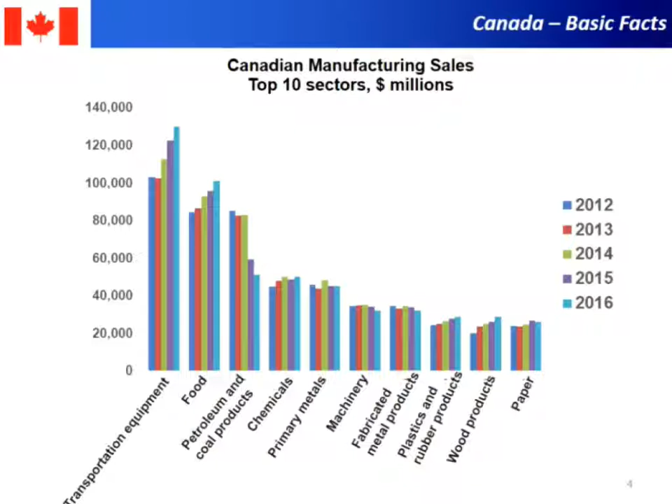If you look at the Canadian manufacturing sector over the last 4 to 5 years, here I picked the top 10 sectors, and each of these colors represents a different year. This is transportation, food, for the various years. The one I'd like you to focus on is petroleum and coal products. Even though it's gone through a major decline in recent years, it is still our third highest manufacturing sector in Canada. It's very important, very critical in terms of its contribution to the Canadian economy.

If you look at it further with respect to Canadian resources, here it is: 90 billion in capital expenditures for major projects planned. You see a fair chunk of it is again focused on energy-related products, and in terms of resources, it's a major contributor to our gross domestic product.

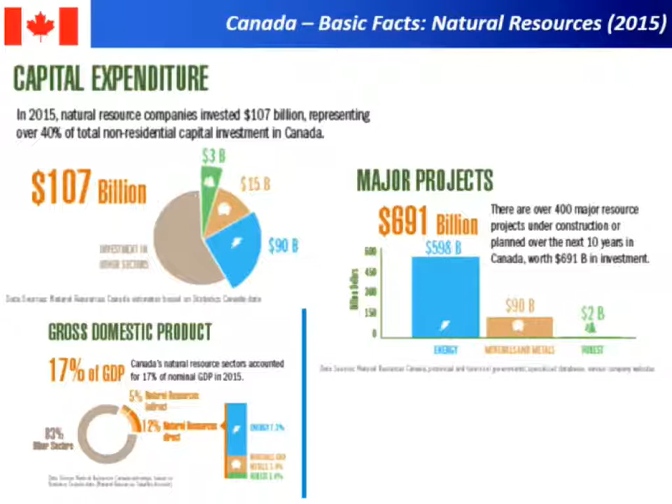In terms of our standing in Canada, Sam McEwen was just telling us about nickel. This one's out of date now because he was just telling us it's number 4 in Canada. But we often in MetSoc focus on the metals. We don't quite focus on where we sit in terms of energy in Canada. In terms of natural gas, we're 3rd in the world. And in terms of crude oil reserves, we're 6th in the world.

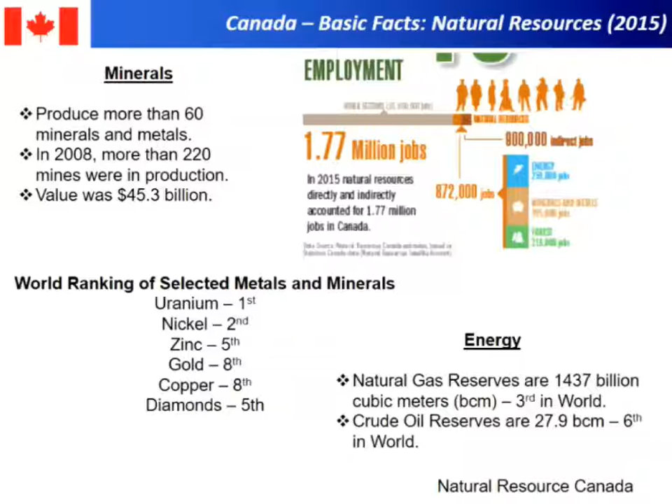So what does MetSoc or materials have to do with any of this? Well, if it's in the ground, you have to transport it. And the most efficient and safest way still today to do the transporting is by pipeline. There's 840,000 kilometers of pipelines in Canada, and this is how they're broken down. Of those, only 73,000 are regulated. So that's a lot of pipe in the ground transporting a lot of material, and we want to do it safely and efficiently. That's where we come in.

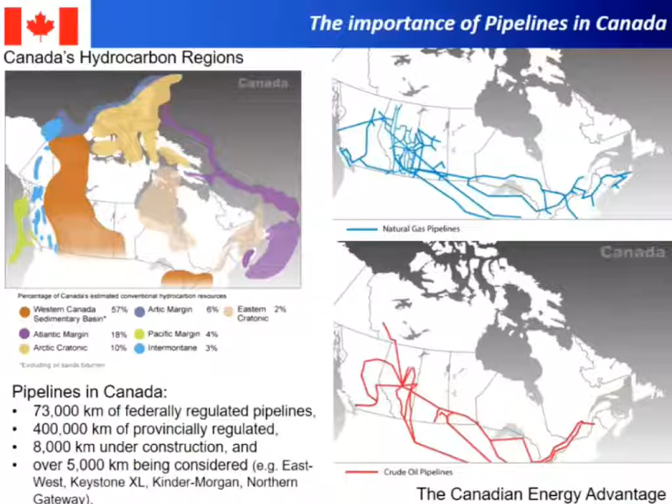Now, we're not the only group in Canada working in this area. Doug certainly contributed for many years in this area. There's a group at McMaster who works in the transformation of the steel. UBC does as well. So we probably have the highest concentration of faculty working in this. And that's because most of the oil and gas is located and found in Alberta, and most of the companies are there and they want to transport it out of there. So we have a group of faculty who work in this area.

So that was about 15, 20 years ago. Evraz basically came to us and said, we'd like to set up a partnership to study pipeline and do pipeline research. You generate the knowledge, we'll watch what you're doing, collaborate with you, we'll take that knowledge and apply it to our steel and our plants. So I won't cover everything, of course. I'll just pick some of the highlights that we worked on. I think most people here are familiar with microalloyed steels.

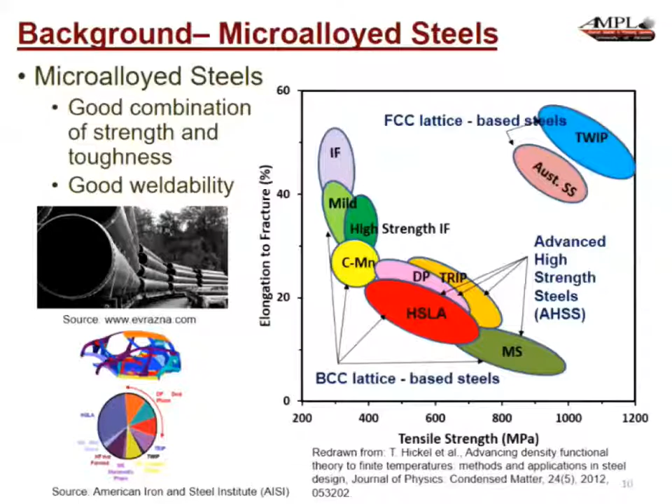Essentially, this is where we are on the banana curve, and we are constantly trying to work with these materials and improve them. However, we may still be in the microalloyed domain.

Very early on, this is work done with my collaborator Jing Li Luo, looking at corrosion of older pipes and comparing them with newer pipe materials. Here is the reduction of area under SCC corrosion condition divided by the reduction of area of this same material in air.

If you're at 1, you're good. If you're below that, you're not good. You'd like that ratio to be as close to 1 as possible, but you also want higher strength.

The reason for the higher strength is then you can work with higher pressure in the pipeline, and higher productivity in terms of transportation.

When you relate these curves to the microstructures of the steels, what this did is essentially lead to the elimination of pearlite from the steel completely, and the replacement of pearlite with various additions of things like niobium to form niobium carbide precipitates.

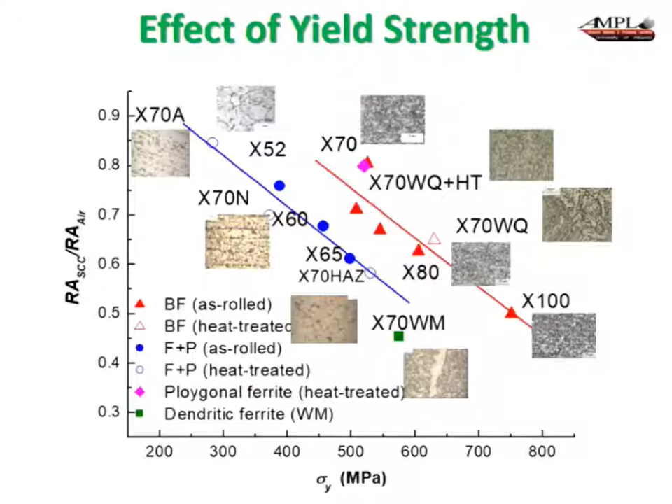To what degree, though, does the niobium carbide contribute to this trade-off between the two? To study that, I'll get to that in a moment, but this is the schematic of the portion of the process that we're going to initially address.

This is after casting. The steel goes through reheating, then rough rolling and finish rolling, forming the pancake austenite, and finally accelerated cooling.

This is superimposed over a CCT diagram where you try to control the cooling rate to get into the right regime of the CCT diagram. I'll say more about this a little later in the talk.

Afterwards comes the coiling part, and during this process, particularly in the cooling and coiling stages, the niobium carbide precipitates form.

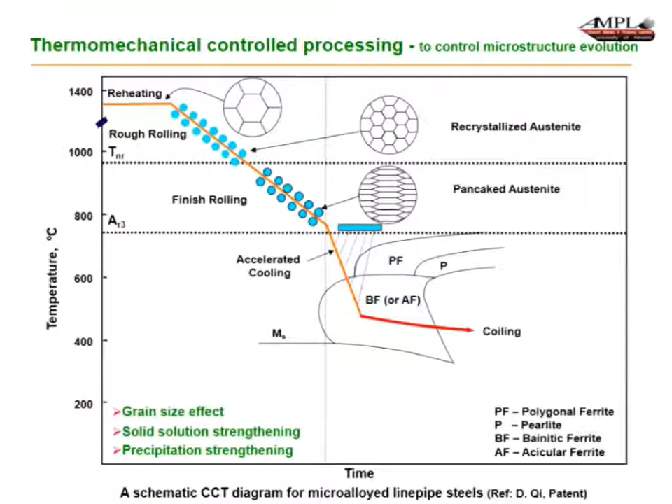So the first thing we wanted to do on the runout table is determine what the cooling rate is. We wanted to do this in the plant. This is a schematic of the cooling table as it used to exist in Evraz.

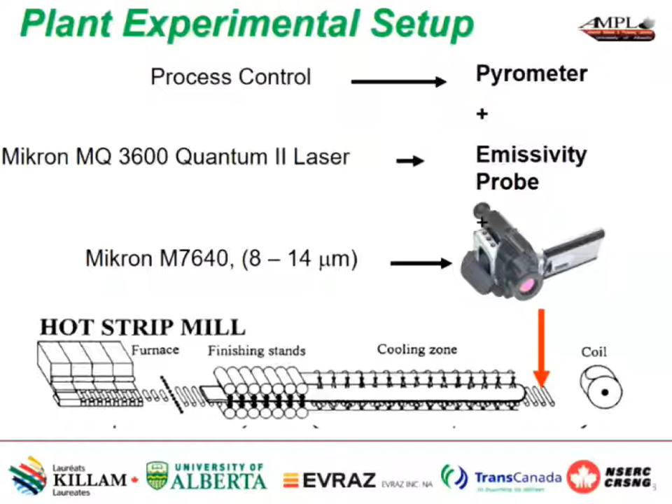We had an infrared camera looking at the strip after it finished with all the steam and water thrown on it. We had an emissivity probe to make sure we were getting the right emissivity on the surface of the steel, and compared that with the pyrometer used for process control by Evraz.

So this is looking down. What you see is the infrared camera, this is the pyrometer, and this is the infrared camera. This is the emissivity probe, and this is their pyrometer.

This is looking down on this surface, and this is an image of the trailing edge of a strip as it's going by. This is the center of the strip, so you get an image of the whole strip, but you can also focus on any particular region and get the emissivity and temperature at that region.

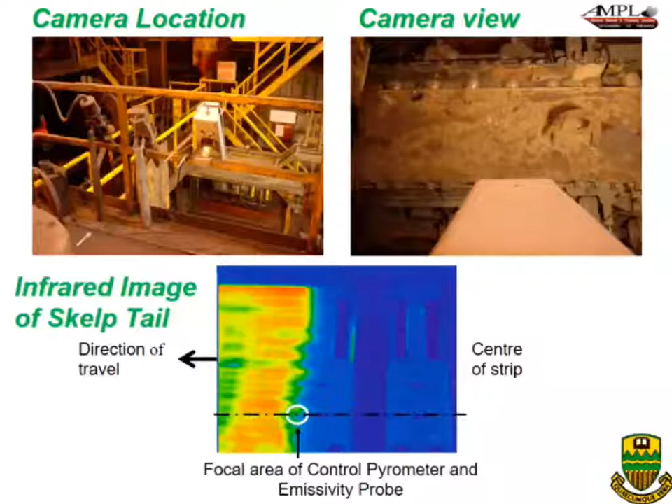Here is a sample of the temperature. It's normalized for obvious reasons, but this shows the fluctuations of temperature across the surface of the strip. This is this particular line, for example, this point being that one here.

If you look at this in more detail, what you see is these fluctuations in temperature as a function of position. So to find the right heat transfer coefficient that will match these variations...

we modeled the region of the columns of water falling onto the strip. The strip is coming at you, so this is the strip width in this direction. You can take a certain portion where you have the water falling down in a column, an impact zone, and then the rest of it, which is essentially a film boiling zone.

We do a discretization of that regime, and this is well established in the literature. But what is the impact zone heat transfer coefficient? We basically did experiments to get the temperatures and then varied this impact zone heat flux until we got very good matching with the measured temperature profiles.

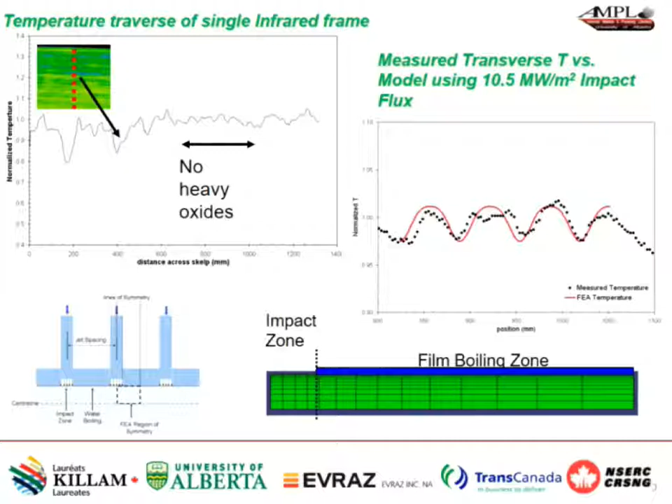This is fluctuating like this because these zones, when low, are where an impact zone column of water is hitting the surface of the strip. So having this heat flow model, the question becomes: how do you make sure you can turn these banks of water along the runout table on and off? How do you control the cooling rate?

Which ones should be turned on and off to control the rate of cooling, not just of the surface, but either at a quarter thickness or at the center line? So we put together an optimization model that looked at various variables in terms of which node you look at, which configuration of banks you should be looking at, what should you be doing with side sprays, because every time a bank of water comes down, before the next bank they blow air to get rid of any residual water or steam on the surface. So what should that configuration be, and how do you vary the velocity of the strip?

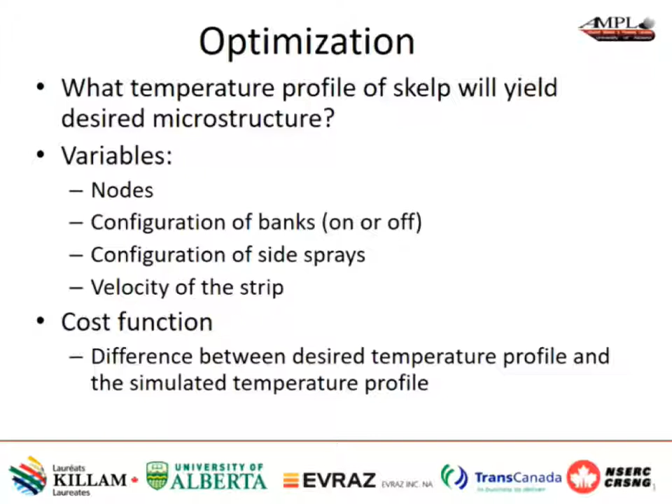The cost function for optimization is essentially the difference between the desired temperature profile that you want to go through in the CCT diagram and the one that you actually obtain from the various configurations that you set in the model.

I won't go through this in too much detail in the interest of time, but here are, for example, the various banks, 1 through 6, and the side banks are 7 to 12. For something like this, you can't just use a simplex search, you have to basically discretize these steps. When a 1 appears in the first set of digits, it means that particular bank is on. In the red digits, it means whether the side spray is on or not. The 101 represents the velocity of the strip, which we use 3 digits to represent. The velocity ranges from 3 to 5 meters per second in increments of 0.25.

So 3.25 essentially are the 3 digits, 13 to 15.

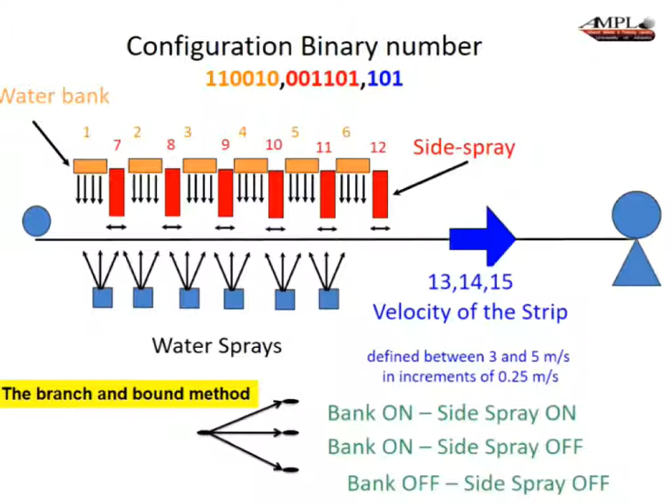You basically run your heat flow model, get your temperature data, compare it with the desired values, and see how far off you are. You then decide which of these to turn on and off, recalculate the heat transfer profile through the runout table, and keep doing that until you reach your objective.

The most efficient way to do that, we found, was using a branch and bound technique. This is the starting point, and with the starting point you might have a bank that may be on or off, and this one might involve the side sprays as well. So the side spray is both on and the bank is on. This one has the bank on but the side spray off, and this one is both off, for example.

You do your calculation at that point and see how far along the path through the CCT diagram you are. Once you pick the one that's closest to where you want to go, you then go to the next bank and repeat the same process, marching along until you reach the very end. By doing that, you can reduce the number of iterations for calculations quite significantly.

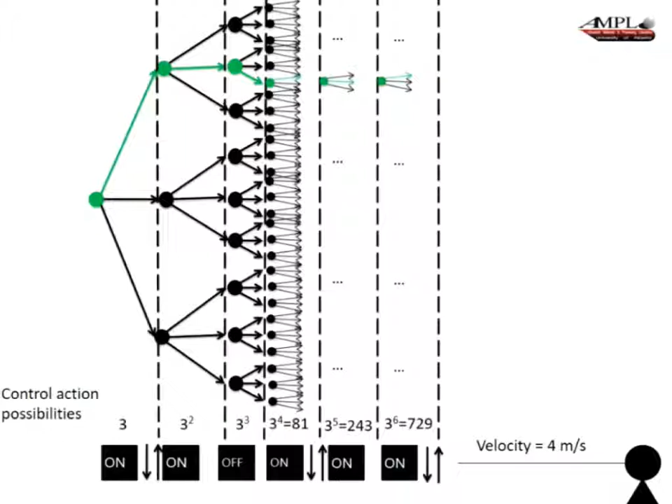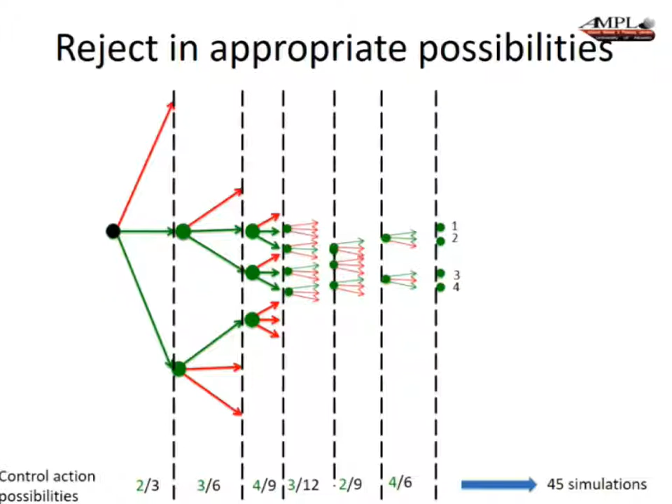This shows the reduction in the number of steps with branch and bound. Let me go back a minute. With 6 banks, doing every single simulation rigorously would lead you to 729 simulations. But with the branch and bound technique, just picking the best ones every time you step through, you can reduce that to a much smaller number, 45 simulations. That's a major improvement in execution time.

When we did this work, it was fairly early in the stage where Evraz was not able to change their configurations in their current runout table. But that led them to their current situation where they've been going through a $200 million expansion and improvement in productivity in their mill. One of the conditions they've asked for the runout table was to be able to monitor and change different banks at different times as they wish, to achieve certain microstructures in their product.

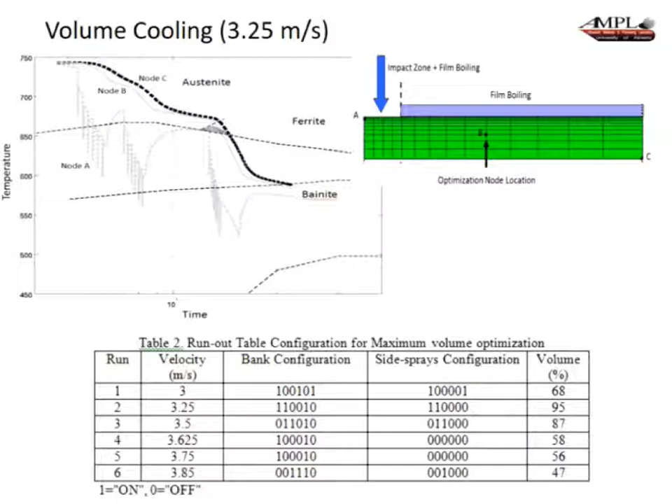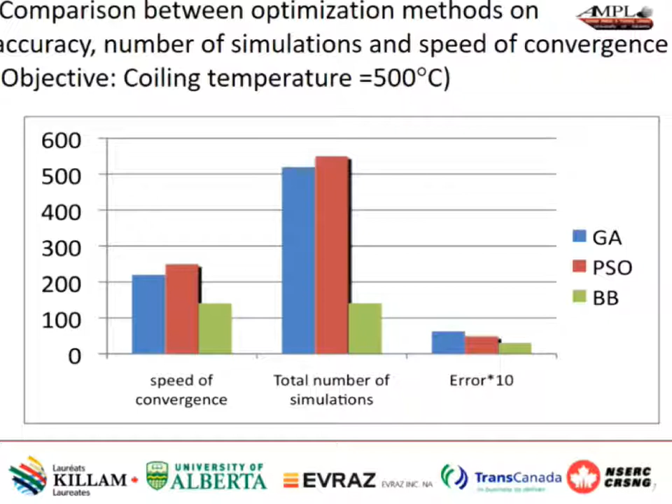And this work was partly related and partly responsible for that outcome. This is looking at the three different techniques we looked at for the optimization: the genetic algorithm, the particle swarm optimization, and the branch and bound. I think for this audience, you can see that the branch and bound is really the most efficient of the three for this particular case.

Now turning our attention to the niobium carbide precipitates, this is looking at the various steels that were examined. It's been known for years that niobium carbide contributes greatly to the yield strength of these steels. They've been characterized in terms of their size and location, but when you look at these numbers, they're very small. How much do they actually contribute to the strength of the steels in a quantitative way?

Well, to do that, you've got to be able to collect these particles from a fairly well representative sample of the steel and be able to then characterize them. And so that's what was done here with these various steels indicated.

The one difference here, you see three X100s. All of the ones above the X100s were done in the steel mill. The X100s were done at the pilot mill at CanMet. At that time it was in Ottawa. So there's a marked difference between the two in terms of the precipitates, as you will see.

So these are X80s, a comparison of X80s. Then there is a Grade 100 that has dramatically different, somewhat different titanium, moly, and particularly vanadium levels. And then the three X100s are shown here. The CT to ICT is the coiling temperature divided by the normalized intercoil interrupted cooling temperature. And this shows the cooling rates for these steels.

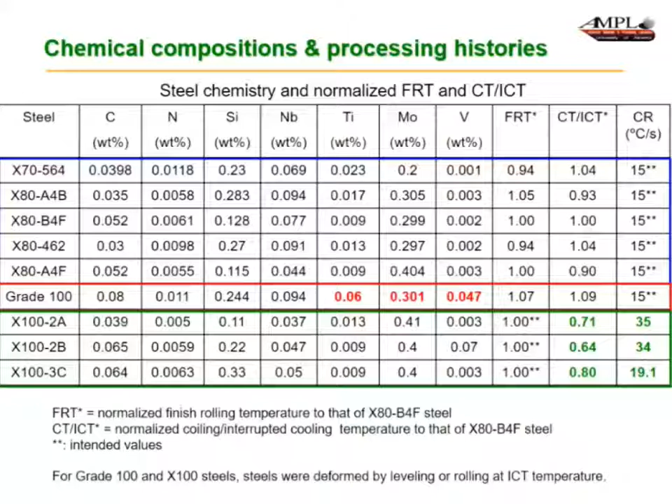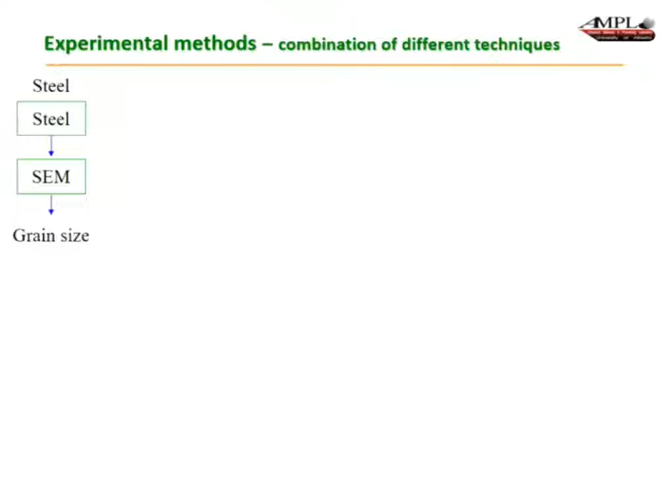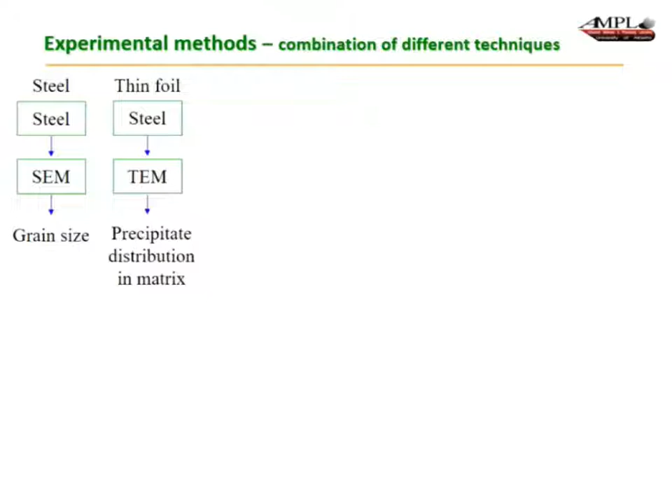Okay, so what was the method used? First, if you have a sample of steel, you can put it in the SEM and get grain size, and that's a quantitative measure. You can make a thin foil out of it and do a TEM to get a precipitate distribution in the matrix, but that's not really quantitative because you don't know the size of the sample, and the sample for TEM is rather small.

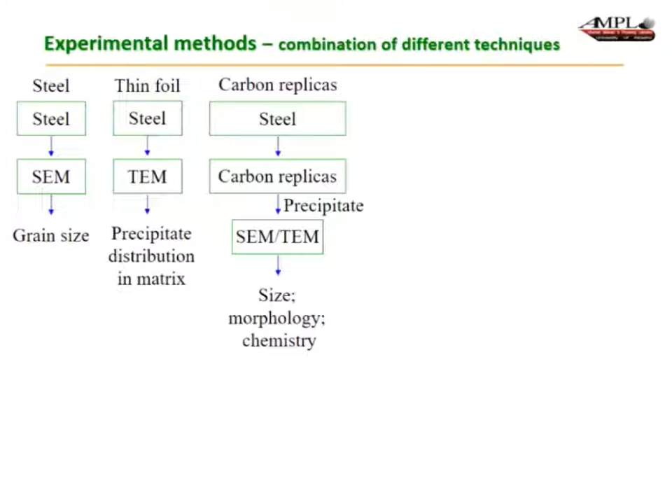If you do a carbon replica, again you can get the size and the morphology and the chemistry, but the sample size is small, and the volume of the steel from which the precipitates come is unknown, really. There's too much error associated with it.

So Jin Fang developed this matrix dissolution method where you dissolve the sample in HCl, and then you take the sample after it's been dissolved, which could be anywhere between 10 and 60 grams of steel. You dissolve it, you then centrifuge, and you decant back and forth until you're left with essentially a solution that you analyze in the ICP.

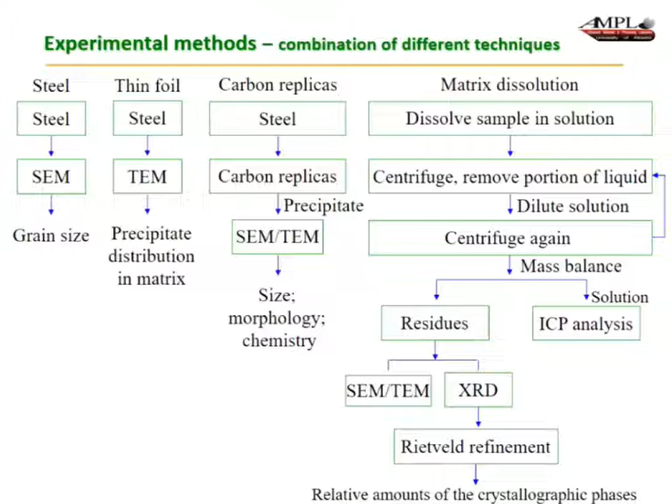And then you're left with, on the other side, a residue where you can do the mass balance in terms of the original sample. This residue of precipitates you can look at with SEM, TEM, XRD, as well as Rietveld refinement.

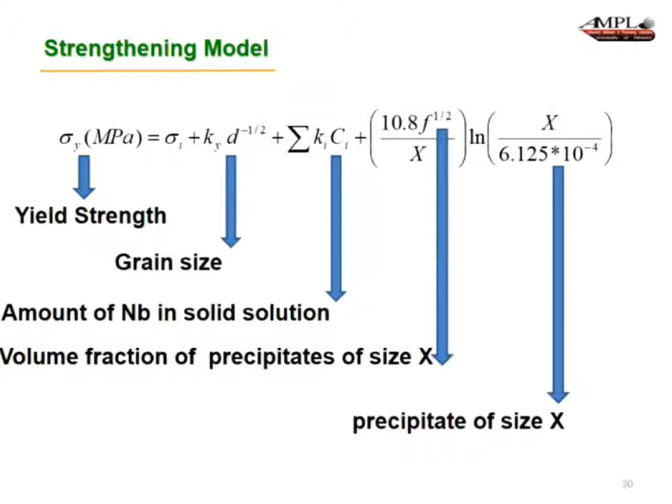So then we basically look at the strengthening model, where this is the yield stress, this is grain size strengthening, solid solution strengthening, and this is strengthening from precipitates. I'll come back and show you this again in a bit.

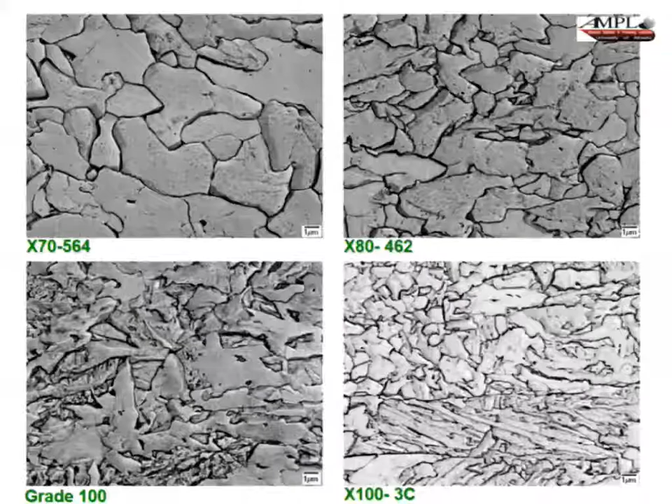So this is measuring grain size for different representative steels that I showed you in the list before. And here you see the strength as a function of mean linear intercept to the minus one-half. They follow the Hall-Petch relationship pretty well.

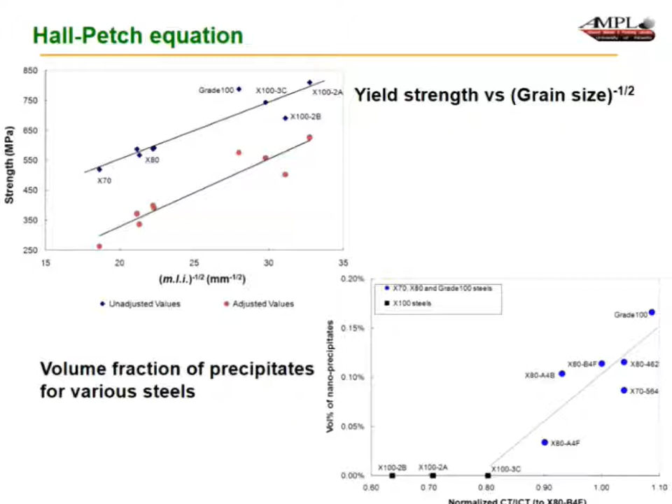Now here is the volume percent of nanoprecipitates. These are the ones collected from the matrix dissolution method, and they're very small percentages. This is shown as a function of the coiling temperature to the interrupt coiling temperature. And you see there is a trend here that the higher volume fraction is related to a process parameter that you manipulate on the end of the runout table.

The silica comes from the fact that when she was doing the dissolution, she allowed air into the vessel. When we've done these same experiments recently, we've introduced nitrogen to keep the oxygen away, and we can collect these nanoprecipitates without any silica around.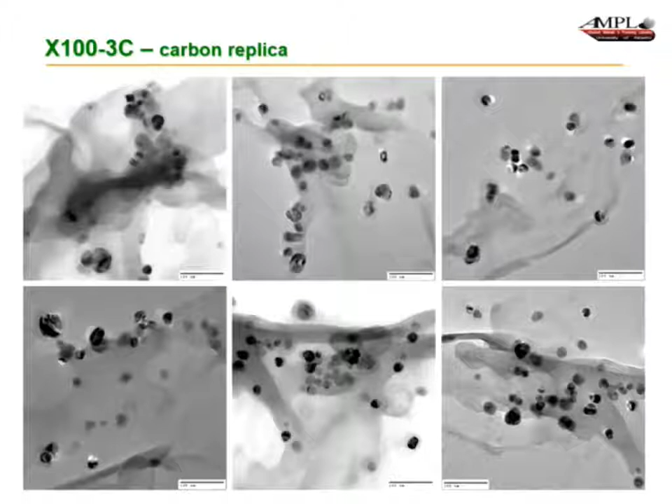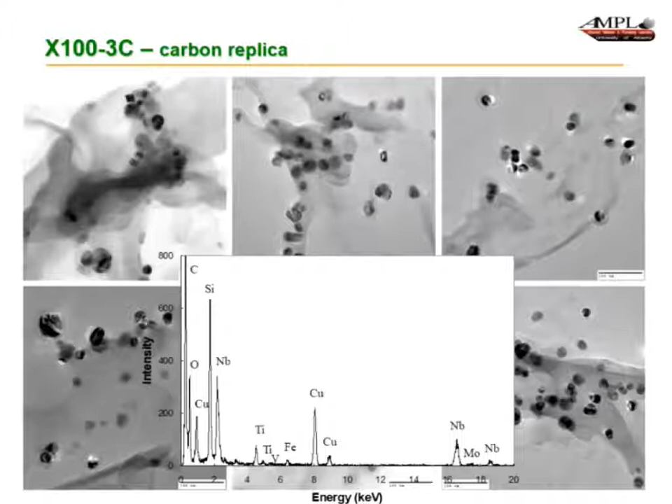The silica did complicate things a little bit, but when you do the EDAX, you can see that they're mainly made up of niobium and titanium. The copper is the grid here, and there's a little bit of moly in there, and the silica and the oxygen are the background in here.

This is a result of the Rietveld refinement, where you can get the precipitate chemistry because you take those precipitates and run them through XRD and run the precipitate Rietveld on them, and you can also identify what their size is corresponding to each of these different chemistries. You can see that the 5 nanometer precipitates, this is where the moly is. This is niobium moly carbides, they're not just pure niobium carbides.

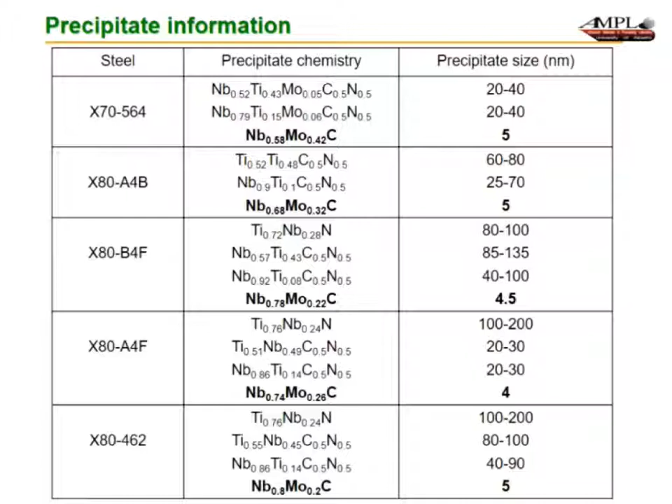And she was able to close the mass balance between the precipitates and the ICP of the solution back to the original chemistry of the steel.

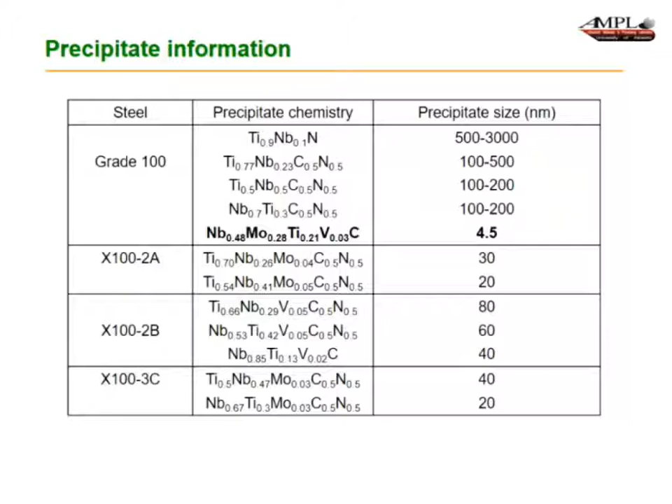Interestingly, the grade 100 had a much more complicated carbide chemistry for the 5 nanometer materials. The pilot scale materials didn't have any 5 nanometer precipitates in there, so that was a surprise to us. In terms of their contribution to the X100, we can't really rely on these results for that particular analysis.

But where does the niobium go in these steels? Here's the weight percent of niobium as a function of the different steels we're looking at. The open portion is the amount of niobium in solid solution, and the closed-in bars is that which is in the precipitates. You can see largely most of it appears in the precipitates, with a little bit all the way through in solid solution.

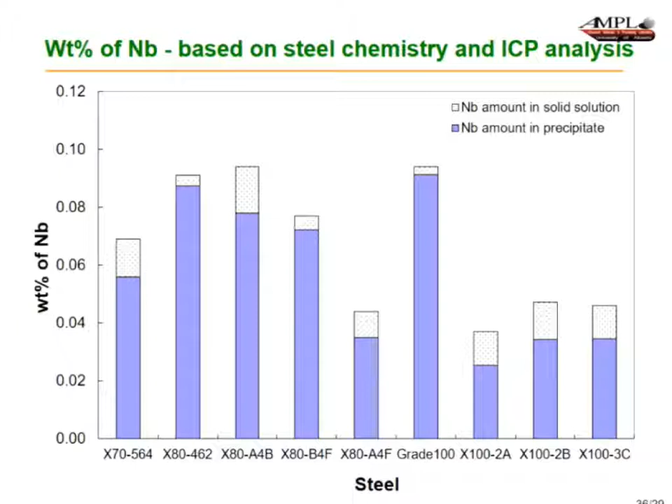That's important for the calculation of the contribution to strengthening. So here is the original equation I showed you, which is basically just a linear summation of the different components. There have been other approaches to calculating the strength: one looks at the root mean square of the different components of grain boundary, solid solution, and precipitate. Another looks at synergy between grain boundary strengthening and precipitate strengthening, but leaves the solid solution and the sigma separate.

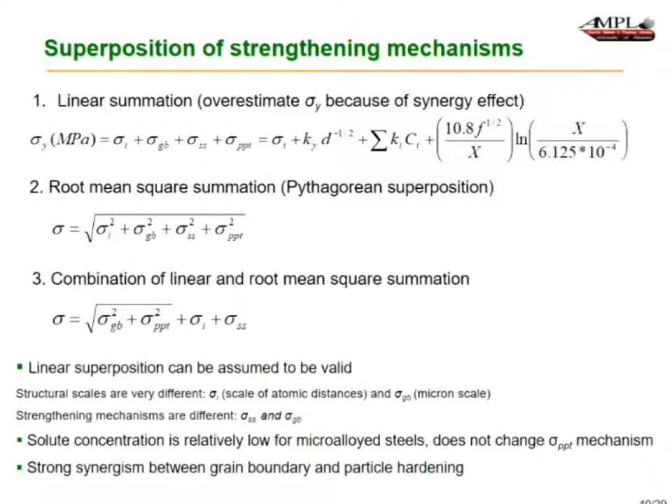So we looked at all three approaches to see which one actually works. There were measurements of the steel's yield strengths that were done. This is the yield strength experimental that is measured, and this is based on the precipitate collected, what appears in solid solution, what appears as precipitates, and what the volume fractions are, obtained from the dissolution matrix dissolution method. These points are just a linear summation.

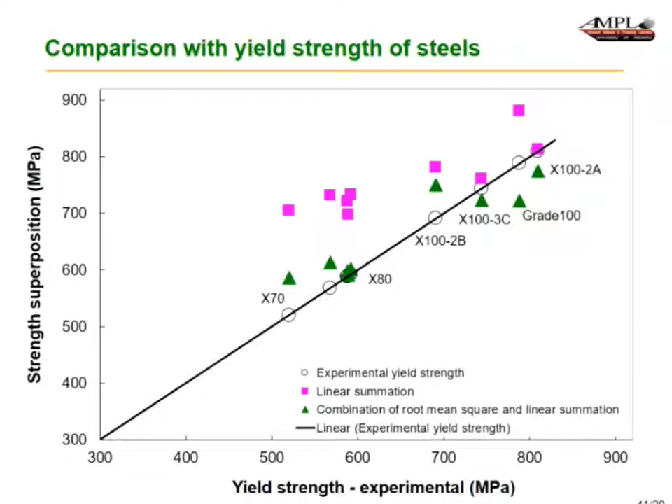But we found that the combination of the root mean square and the linear summation seemed to fit the experimental data. So there is some synergy between the solid solution and the grain boundary and the precipitate strengthening that is taking place in strengthening these materials.

So a pinch is really having a huge impact on the properties of these steels, and this is now shown in a quantitative way.

This has been proven to be quite invaluable in our continuing work with Evraz as they're upgrading their mill, because now people want to go towards thicker walled pipe. While they're manipulating their chemistry and checking their new process parameters with the new mills, this approach is quite valuable to them to figure out where their alloying elements go, because that way they can see what the strength is relative to how much money they're spending on alloying elements.

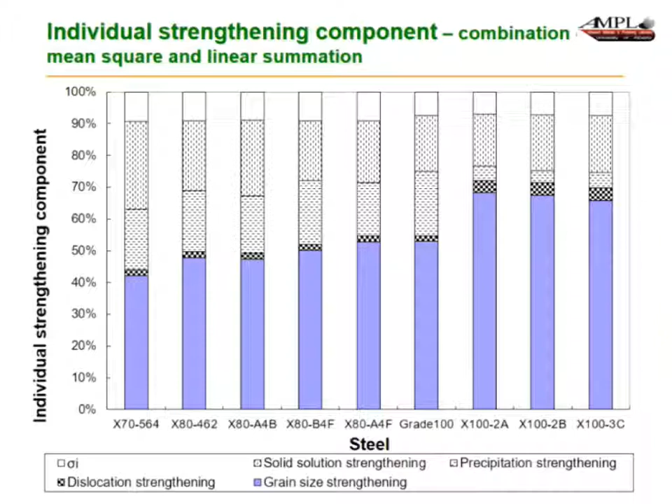The last example I want to look at, and I hope my time is doing okay, is one of the things you have to do once you've made the skelp: weld it into the shape of a pipe.

Typically this is for spiral welding for large diameter pipes. They're usually done through tandem submerged arc welding, where you've got two electrodes, you supply voltage and current to both of them. They basically form an arc, and you start to weld the steel under a flux that's covering the whole thing.

When you're working with thicker walled material, or when you want to weld a little bit faster, there's an awful lot of latent heat that results in these pools. So the question came about, why don't we try to suck up some of that heat in an interesting way. The idea was to have a trailing electrode, a third electrode stuck into the weld pool, whereas the third electrode is cold. That means you're not putting in any voltage or current through it. Its sole function is to melt and use up the latent heat available in the pool.

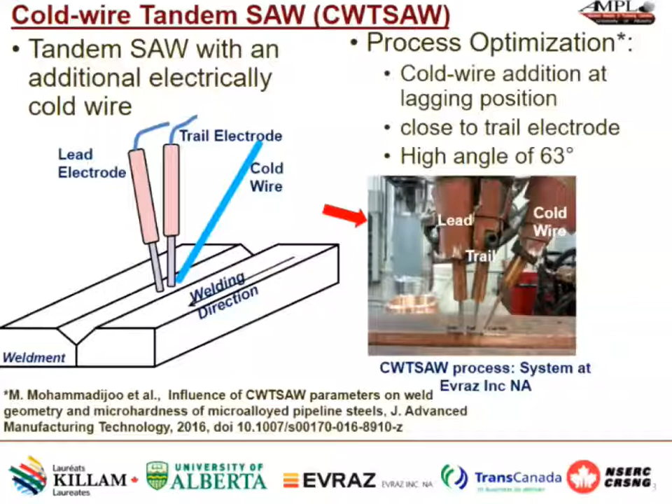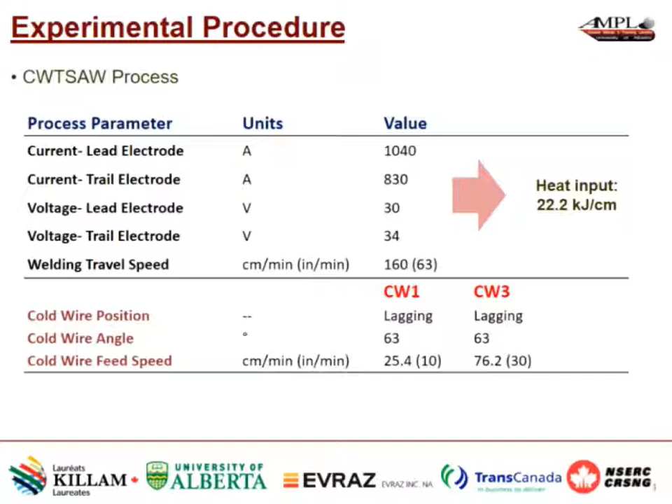So we worked with that. These are some of the conditions of the test. I'm jumping through a lot of the work that Mosen did for this particular study, but essentially we were dealing with roughly around 22 kilojoules per centimeter as being a good heat input. So we decided, let's work with varying some of these parameters, keep that heat input fairly constant, but vary the wire feed conditions to see what effect that has on productivity and the weld conditions. That's what CW1, CW3 represent, and this one basically represents no cold wire added.

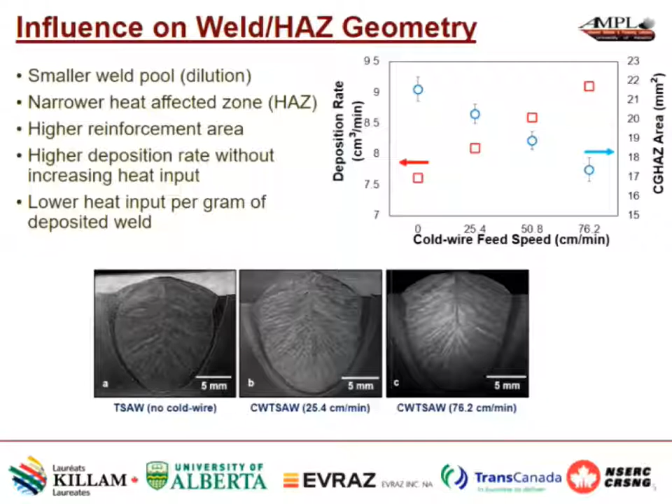So what we've seen is the weld pool dilution - I show you here three cross sections. This is no cold wire added. This is with cold wire added at this speed. This is the third case with a faster speed. And what you see here is the deposition rate as a function of cold wire feed, with the red points. On the right is the area of the coarse grain heat affected zone, which is the most critical area in terms of properties in the material. As you speed up the addition of the cold wire, that region gets smaller, your productivity goes up, so everything initially looks really good. However, you then go ahead and do your micro hardness and Charpy tests, and something else appears.

These are averaged over a whole range of hardness measurements done across the face of the fine grain and the coarse grain, as well as the weld metal. But what you see is that there is a minimum hardness right around 25 centimeters per minute. And for the Charpies, this is where the Charpy notch was located - you see that that has pretty much the higher toughness, even with different temperatures.

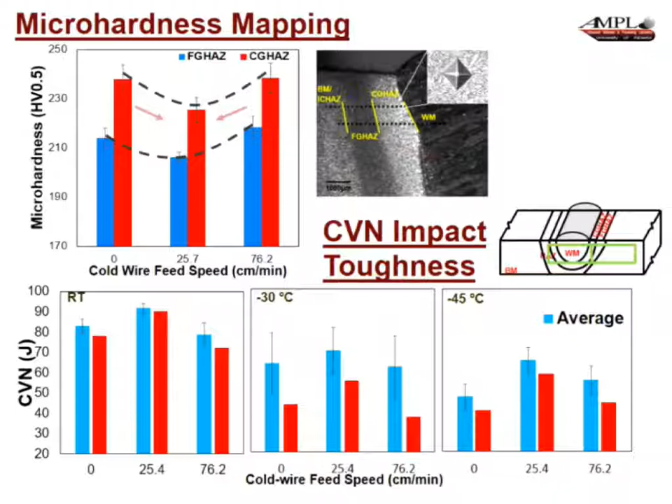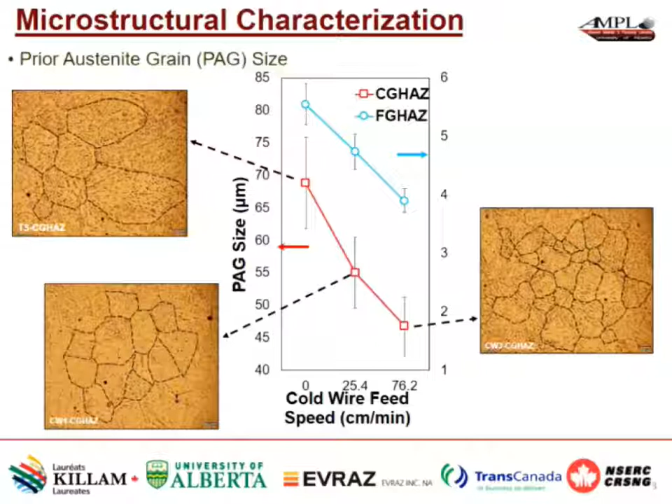So you wonder why that is the case. We went and did prior austenite grain size measurements, and these seem to be lower than the ones without the cold wire, but the higher speed seemed to have even smaller prior austenite grain sizes. So that wasn't the reason for it.

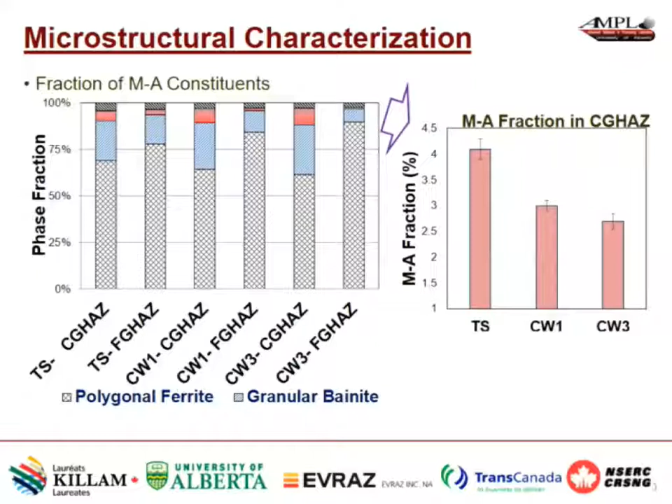So then we went and looked at MA constituents. There you see a more detailed plot showing that the MA constituents decrease as the feed rate of the cold wire increases. So that isn't entirely the full reason for why we see that difference.

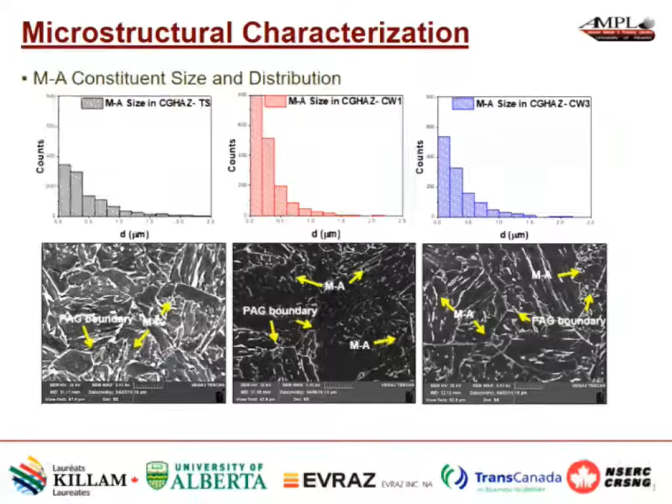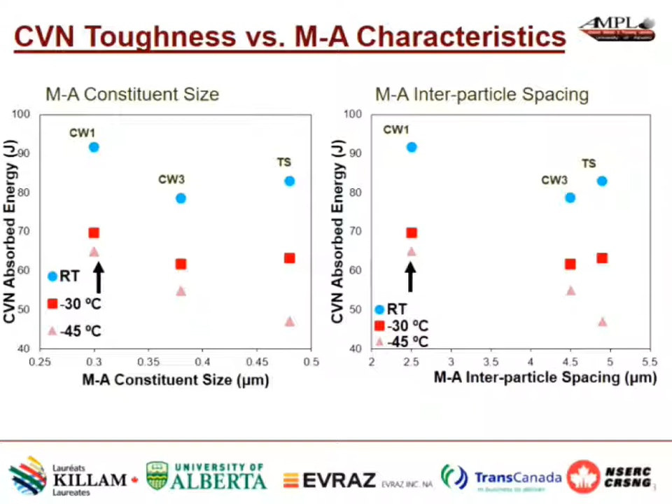So these are the results of the summary of what we get with the cold wire addition, and that is ongoing as we look at the thicker walled materials moving forward.

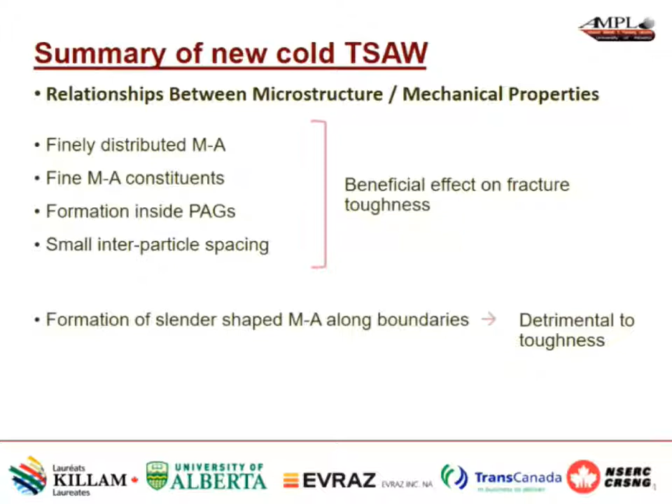What was the impact of what we've done over the years of this research? For the industry, we've generated new knowledge that they can apply as relevant to their application. They were the first producer of X100 in North America, even though it's not widely utilized yet. We had a small contribution to play in that.

They were able to qualify their X80 for Arctic regions, for when people were looking at transporting gas from the Arctic down. That project is on hold for now, but they qualified for that particular application.

They've improved their weld quality while improving production, certainly with the cold wire addition, which is something we're going to further improve as well. Slab efficiency has improved. All of these things have benefited them, and they're currently expanding their mill with a $200 million expansion.

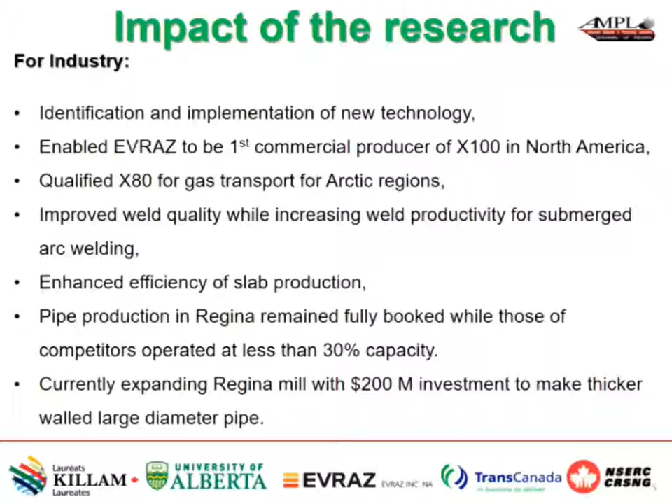This is an interesting point, particularly for employment in Canada. We went through a period where a lot of pipe producers in North America were slowing down and reducing their productivity, but EVRAZ still stayed quite productive.

From the standpoint of the University of Alberta, we became the leading source of highly trained people for this particular industry. A lot of our graduates do stay in Alberta and work in adjoining or related companies in the industry. Some go away and do PhDs in France.

One in particular in the audience. I think we're recognized through a couple of international awards that we've received for the research we've been doing, and that's gratifying.

One of the things we take great pride and satisfaction in is knowing that a lot of the steels made today for pipelines are far more sustainable than they used to be, and we contributed to that advancement, as well as others, some of whom are in the audience.

We've advanced the state of knowledge of advanced microalloy steels for transport in Canada. What's not shown here is the opportunity this has given us. What hasn't been revealed is you've seen me talk about optimization, heat transfer, and a lot of microstructure evaluations—I'm not an expert in all of these areas. I have colleagues who are.